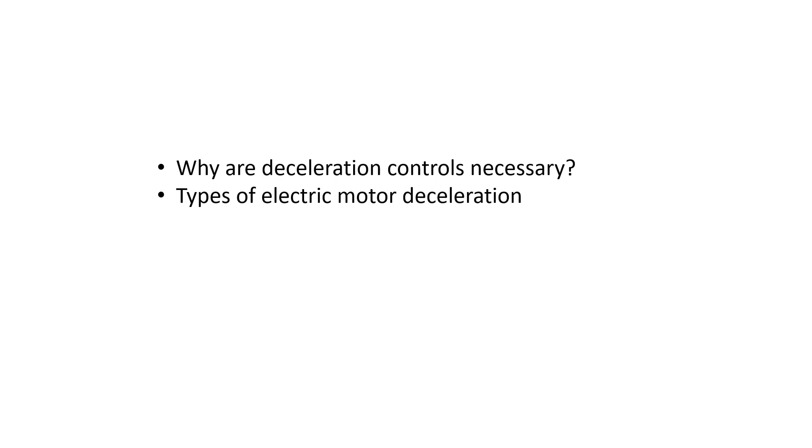More of a listing. Now, deceleration is an extremely long word. It has far too many syllables, as most experts agree. It's much easier to simply use the word braking, but let's face it, deceleration makes us sound smarter.

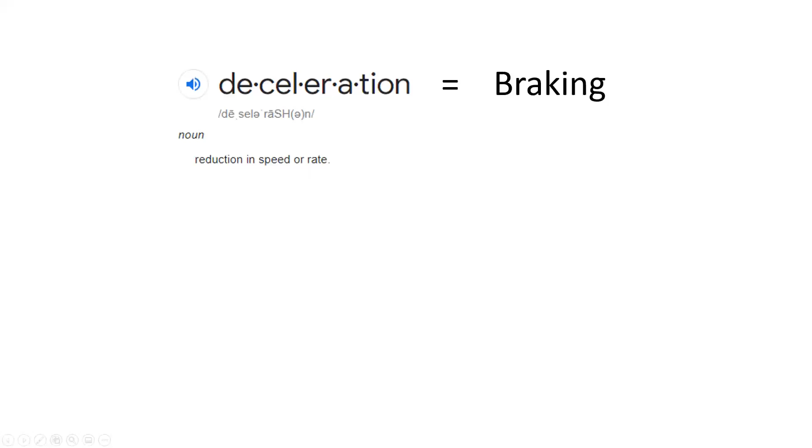It's good to know that in the electrical field, depending on the application, when a motor is de-energized, the mechanical load may cause the motor to continue rotating. At times, this can be quite dangerous.

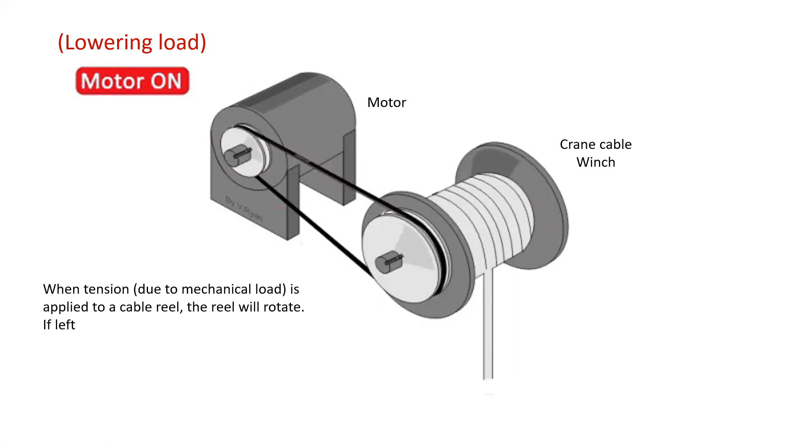If we look at this, where we have a motor lowering a crane cable winch, and the motor is on, and now we turn the motor off, notice that it keeps turning. The vertical tension due to the suspended load, when applied to a cable reel, will cause the reel to rotate as the load drops. So obviously a system like this for a crane or winch would not work very well.

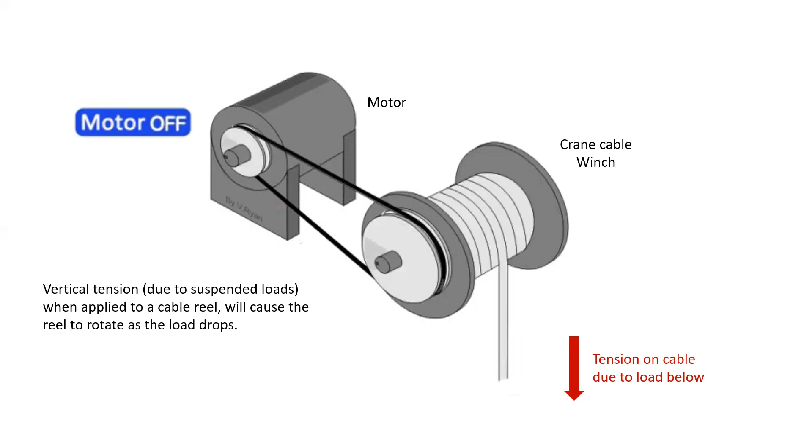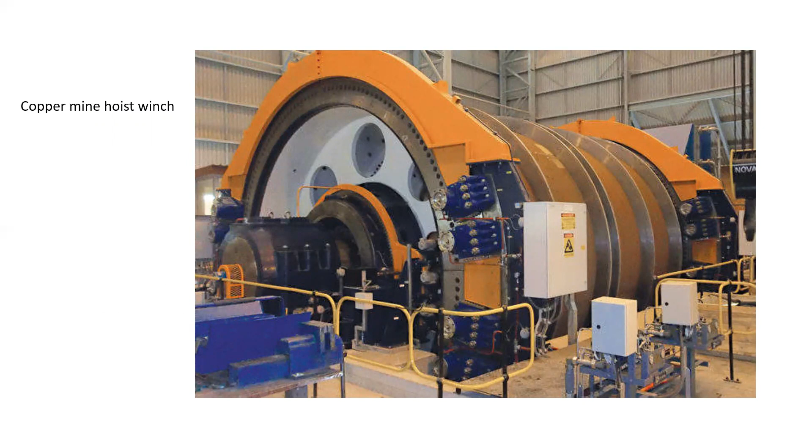So we have all sorts of different types of cranes and winch systems, from really massive mine hoisting winches, where we have massive brakes on them to ensure nothing moves after we've stopped the motor, to things like elevators, as well as the standard mobile overhead crane system. All of these motors need a means of ensuring that the motor does not rotate when we have stopped turning the load.

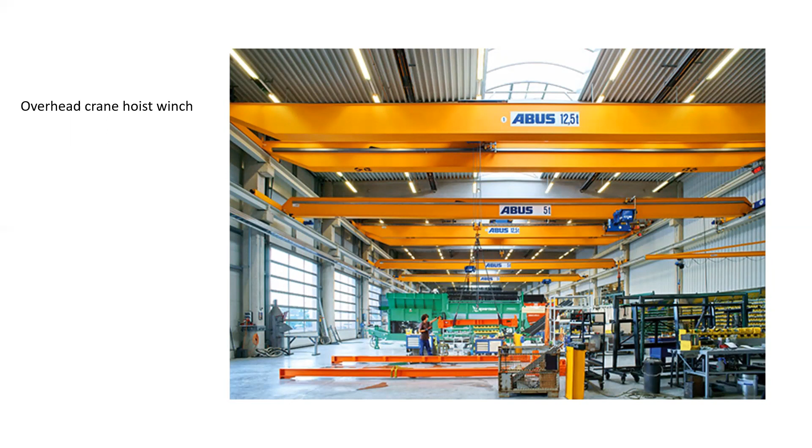However, when we get to inclined belts, there is an additional hazard. So something like this, a really large conveyor system, we really need to ensure that the conveyor will not move if it's ever shut off.

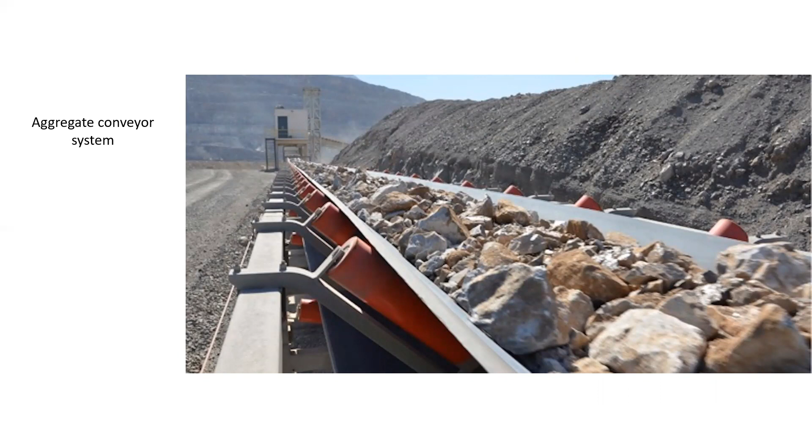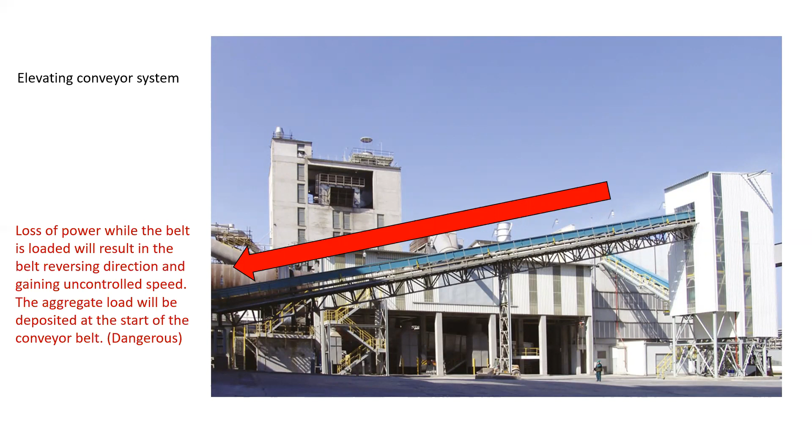Because if it's on an inclined plane like this, if it were to shut off and it was loaded with all sorts of rock and soil or whatever else, the loss of power while the belt is loaded would result in the belt reversing direction and gaining uncontrolled speed. The aggregate load would then be deposited at the start of the conveyor belt, just pile up, and that would be extremely dangerous.

Another place that we use braking is when we have heavy, dense, large diameter mechanical loads, which gain significant inertial energy when spun. After being spun up to high speeds, it could take significant time for the load to coast naturally to a stop, seconds, minutes, even hours, which is kind of ridiculous.

It's considered a waste of time, right? And the efficiency of the process would have to be elongated because you have to wait for this thing to stop turning. And of course, there would be an increase to the potential for worker injury.

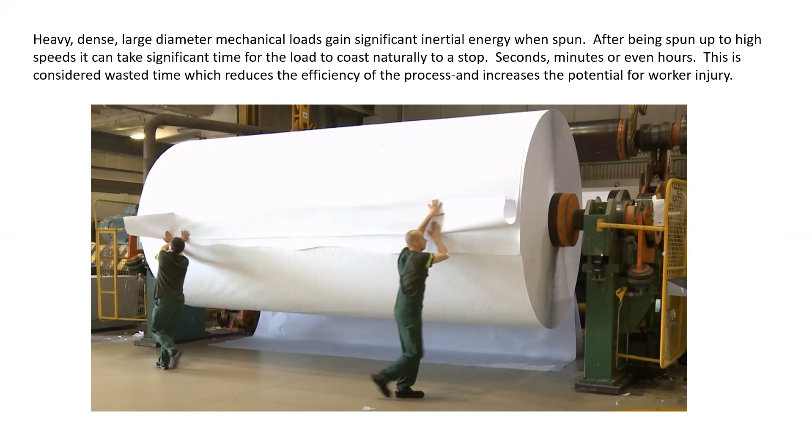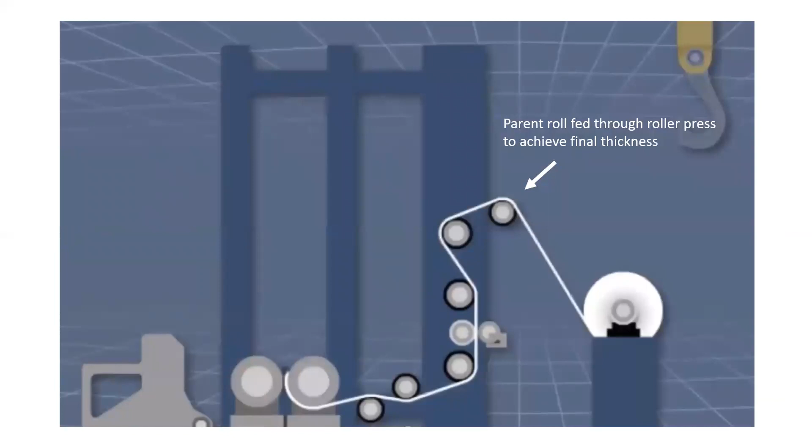And so what we have a picture of here is a paper roll at a paper mill. The process, very simplified here, is they take the parent roll and feed it through a bunch of different rollers and get the precise thickness that they want, and they start rolling that.

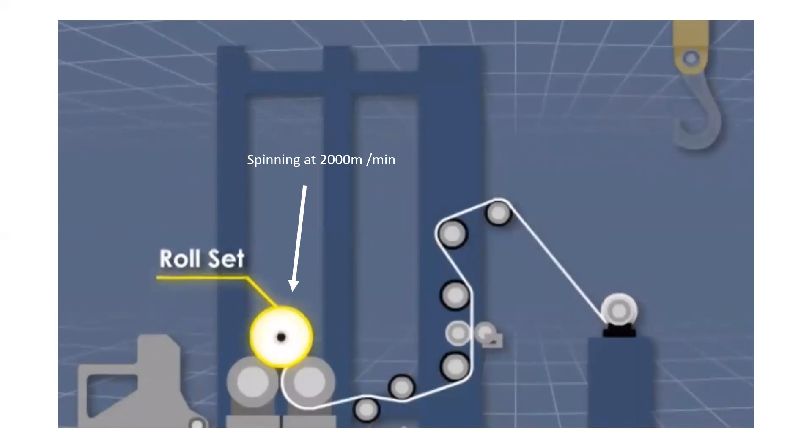But it is a fast process. So upwards of 2,000 meters per minute, you need to slow that thing down as soon as it's at its full diameter and stop it, because you need to then quickly move it off and start the process again.

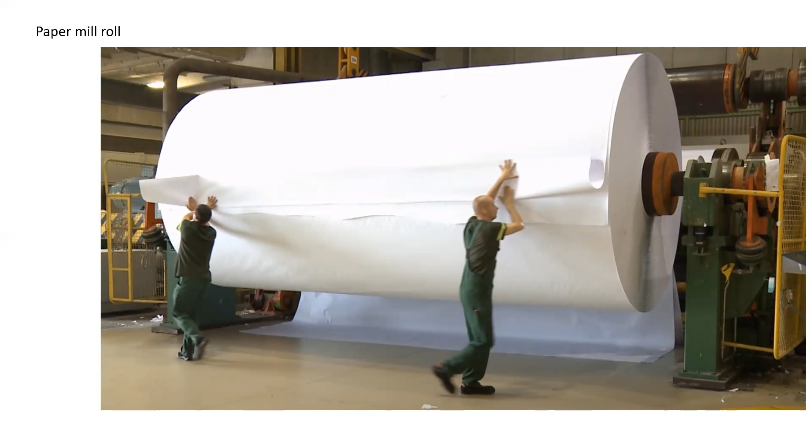And so things like this need to have braking systems to quickly bring it down in speed so that we can then have it stationary and transport it to a new location. This is also the process that would take place with things like steel coils when that's being manufactured. Same idea, very fast speed. For efficiency, they need to stop it very quickly in order to facilitate transportation.

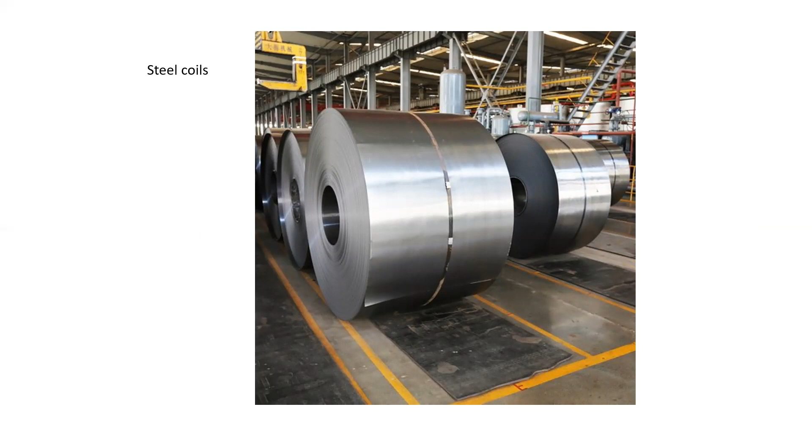Another application of braking is in wind energy generation. It requires braking systems to ensure that extreme wind events during low electrical load periods does not exceed the assembly's RPM rating. Otherwise, significant damage can occur.

And to put this in perspective, what we're talking about here, if there's very little electrical load on an alternator, the prime mover would not be working very hard, would it? It would be sort of coasting.

But in this situation, we have the prime mover being the wind. And if the wind is pushing very hard and there is no electrical load, that means there is almost zero counter torque being applied by the generator because it's not supplying any electrical load. It's very easy to spin the rotor.

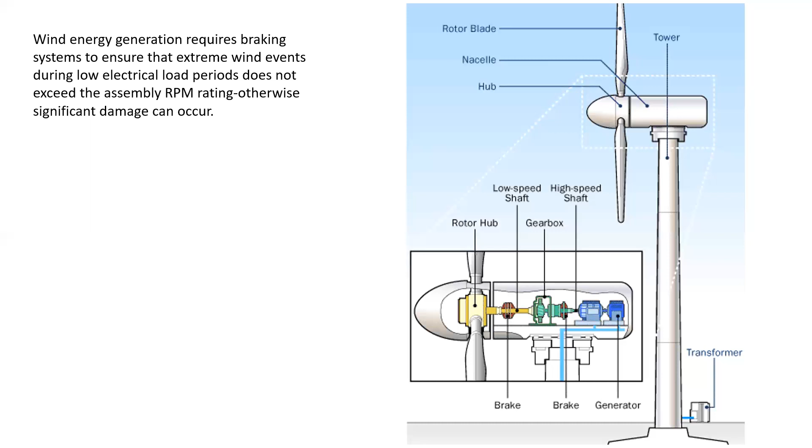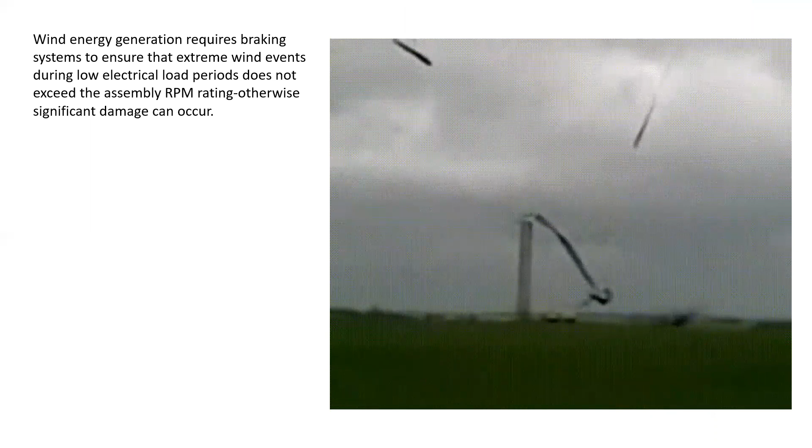And with an extremely high wind event and no braking in a no load condition, we can get dangerously high speeds, which we can see here leads to the catastrophic destruction of the wind generating assembly. So there are braking assemblies used in all sorts of different areas of the electrical trade.